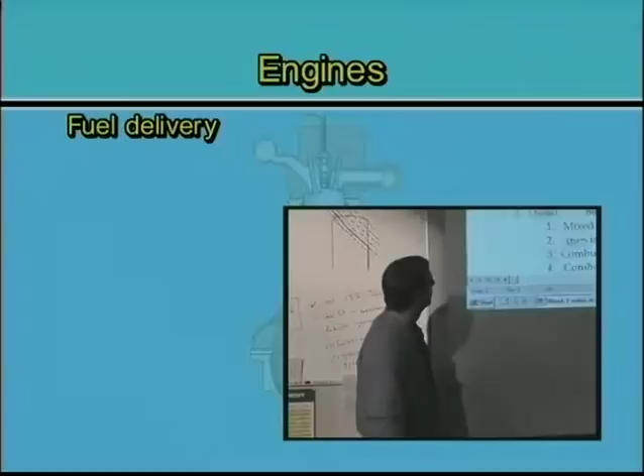Fuel delivery. We're going to talk about gasoline versus diesel. In a gasoline engine, the air is mixed with the fuel in the intake manifold, which means as air goes through the carburetor, it pre-mixes it. As it's traveling down the intake, it swirls, it causes that fuel to mix better, and it breaks those fuel molecules down into a vapor.

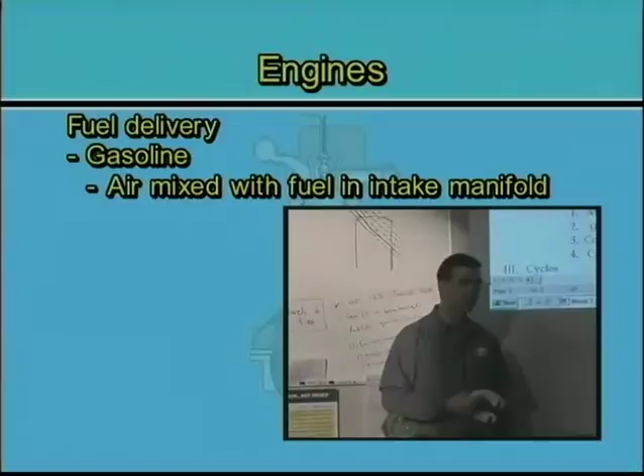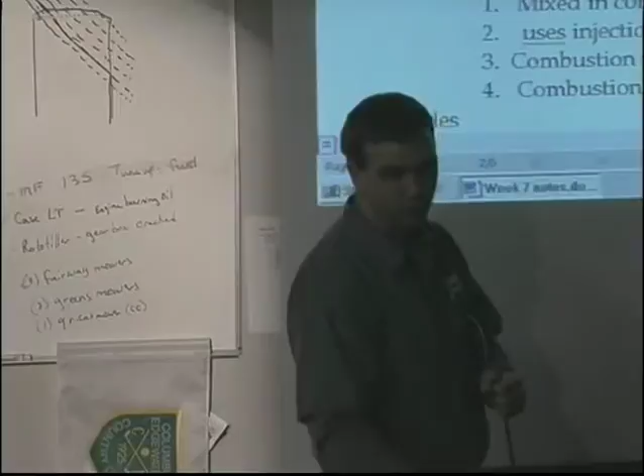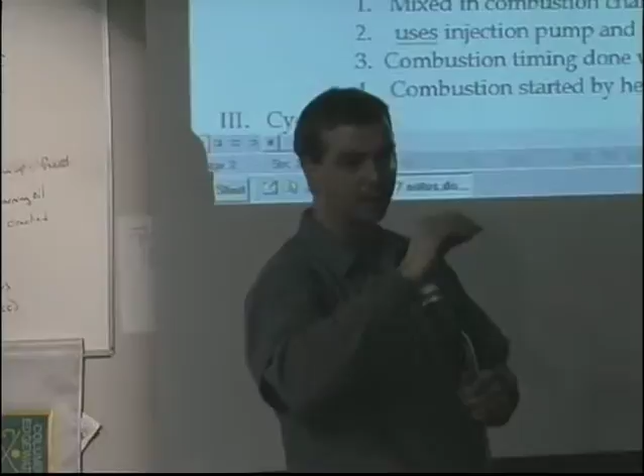Every piece of fuel that goes into an engine has to be in a vapor form to actually properly burn. If I take a can of gas and I drop a match in it and I have it mostly covered up, what's going to happen is the match will go out. Because if I put a match into a liquid that's cold and there's no vapors, it won't burn. What actually burns when I drop a match into a can of gas is as the match is falling, there's vapor on top of that fuel, and it ignites the vapor, and that causes it to explode.

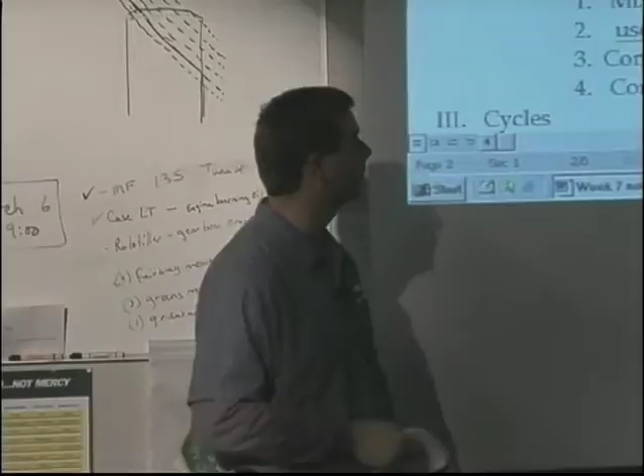If you take a full tank of gas and throw a match in it, it could blow up, but usually they don't. But an empty tank of gas blows up because it's just full of vapors. And vapors is what it takes to burn. Use the carburetor or fuel injection. We're seeing fuel injection come down into this industry pretty common now. In order to meet emissions, we're going to overhead valves and fuel injection systems. This industry has to meet emissions just like the auto industry. And so we're seeing more fuel injection, more expensive engines in this industry.

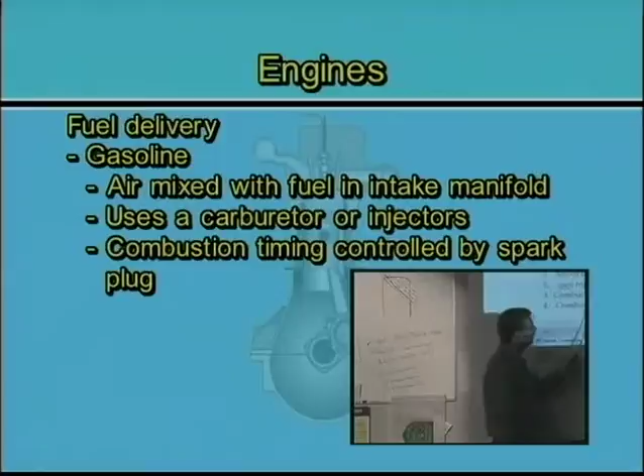The combustion timing is controlled by the spark timing. The spark plug, when it fires, determines when that fire begins in that combustion chamber. The combustion is going to be started from the spark of the spark plug, and so if I don't have a spark, I will not have ignition.

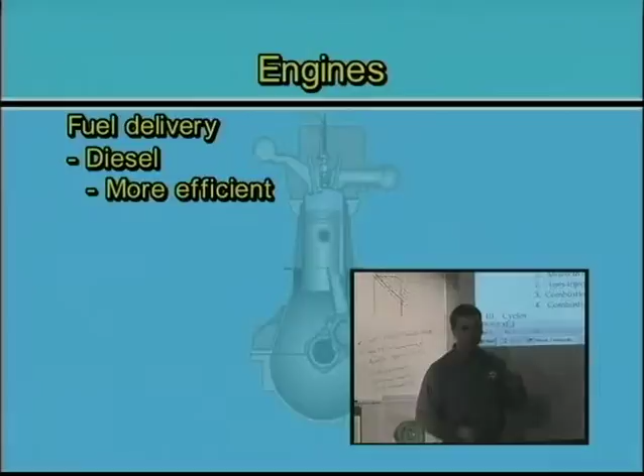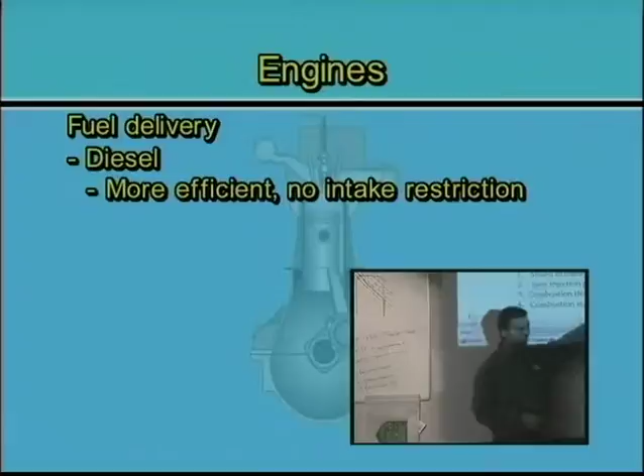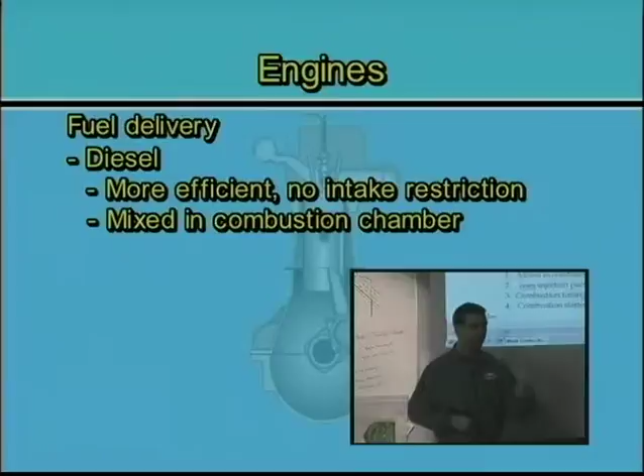In a diesel engine, we're going to inject the fuel directly down into the combustion chamber, and the only thing that goes through the intake manifold and into that cylinder is air. It's an unrestricted air passage that goes into there. So I can draw in a full charge of air, and then depending on how much power I want, I can meter in just the amount of fuel that I want to run the engine. But it has maximum amount of air, so it takes very little fuel to actually get energy out of that fuel.

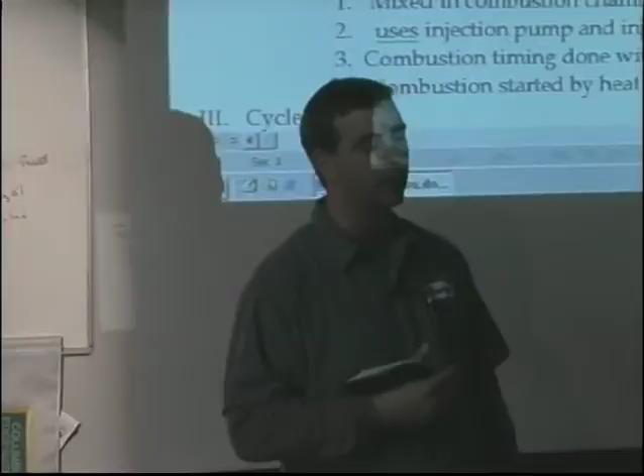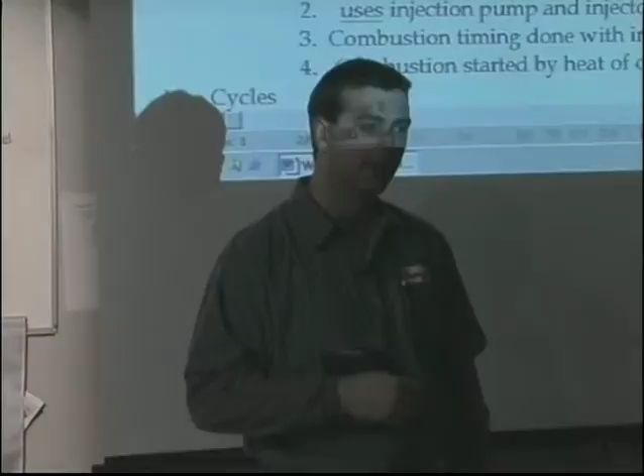If you have like a carbureted engine, could you change it to fuel injected? If I have a carbureted and I want to change it to a fuel injected system, it would take a lot of work. You'd have to have something to control the fuel injection system. So unless the engine was designed for both ways, no. So let's say you have a Kawasaki. Kawasaki has a V-twin, and you can get it carbureted or fuel injected. The difference is the intake manifold and then a bunch of sensors.

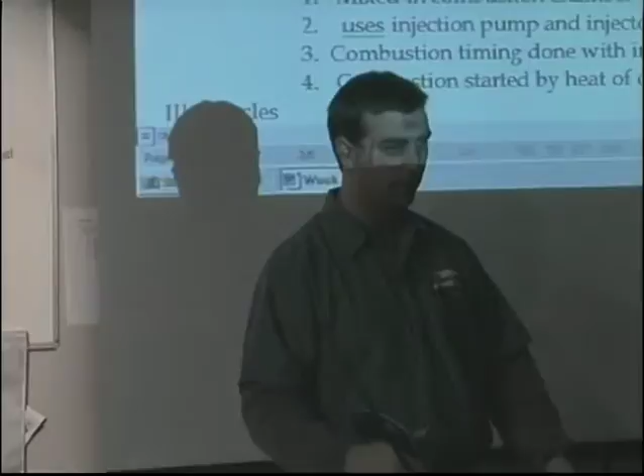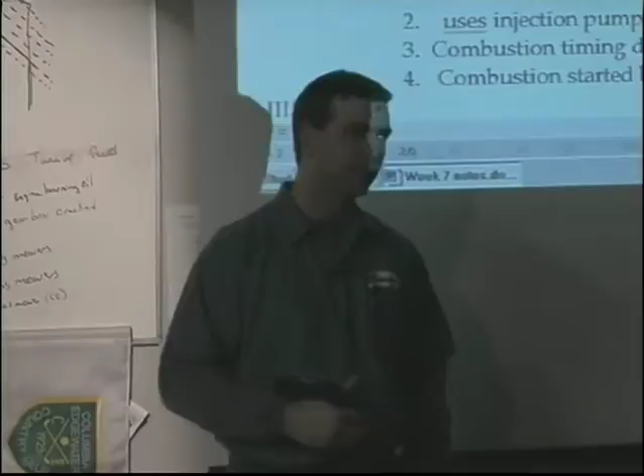But the basic block is the same, so as long as you change all the stuff on the outside, you could. But then you'd have to have the control unit that controls the injectors, and there's a bunch of other components. It'd be pretty expensive. And so it's highly unlikely someone would want to do that. You'd want to just buy the whole engine or sell it, start all over with a whole different machine.

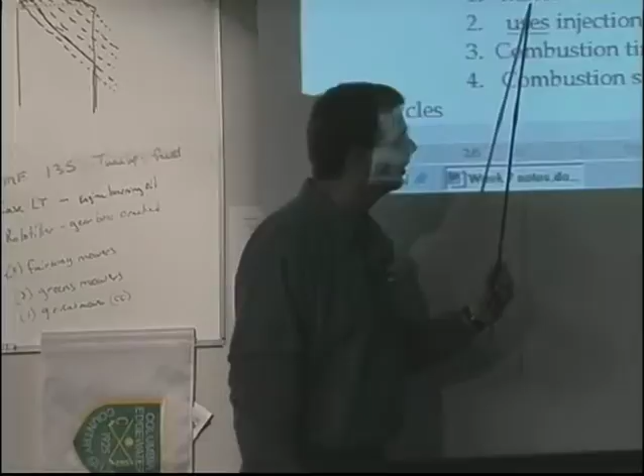In a diesel, the fuel and the air is actually mixed in the combustion chamber. It's not mixed in the intake tube. It's just air going through the intake tube. It's mixed in the combustion chamber. It's mixed as that piston comes up and heats the air. It causes it to turbulate. The air is turbulating, but it's just air. So you get this violent turbulence taking place. And when I throw the fuel in there, it's thrown into this violently mixing air, and it stirs it up and burns it.

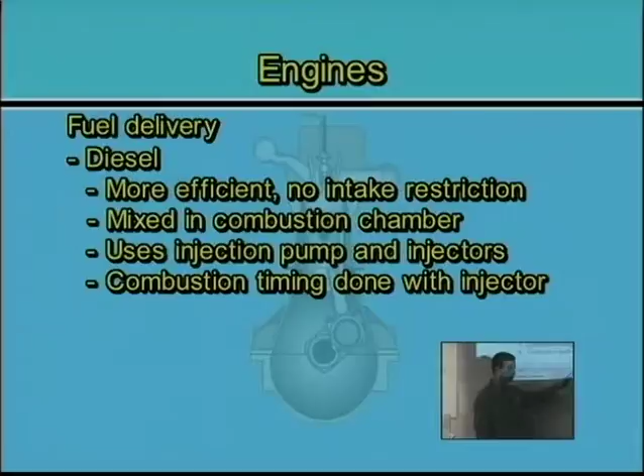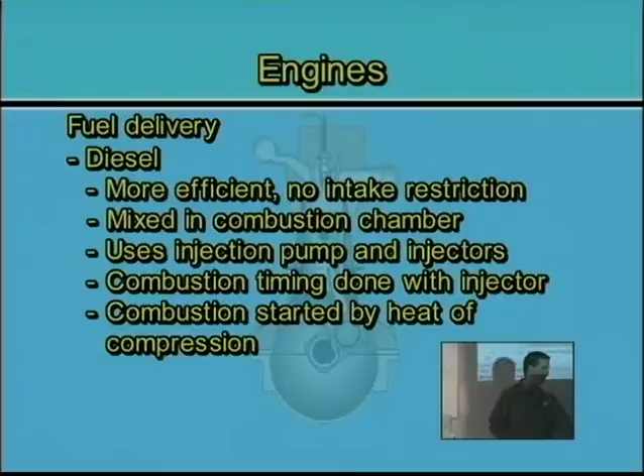The combustion timing is actually determined by the injector. When the injector actually starts putting fuel into that cylinder, that'll determine when combustion starts. The combustion is actually started by the heat of compression. Even if I inject the fuel in there with my injector, if there's no heat in there, it won't burn.

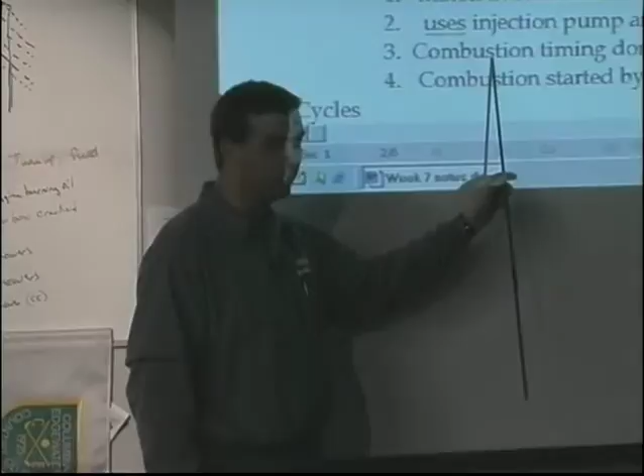Now that's what we talked about earlier today. We talked about minimum cranking speed, using the cold starting aids. That's so that we have enough heat that when I throw fuel in there, then it will actually ignite. And if I don't, it just goes out the exhaust pipe as white smoke.